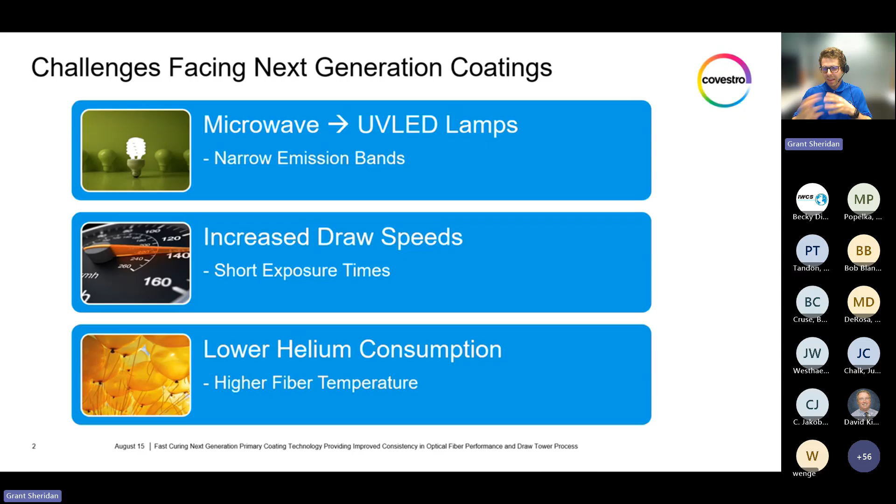So our work at Covestro is aiming to develop these next generation primary coating technology to meet the switch to UV LED lamps, access draw speeds above 3,000 meters per minute, and be more insensitive to fiber temperature for the mechanical properties.

Now, to demonstrate our next generation technology, we first ran our coatings and evaluated them using our in-house draw tower simulator, which is very handy for developing coatings as we were able to change the setup in-house. Our draw tower simulator is able to operate either on wet on wet application or wet on dry application, so we could really tune the process to the coating we're trying to develop. In particular, for this presentation, we are looking at a wet on wet application using UV LED lamps to mimic the switch in industry.

For the draw tower simulator, we use metal wire and feed it running down, and then for the wet on wet, the primary and secondary dies are coated here, and then run through up to 3 curing lamps, or 3 UV LED lamps in this case. With our draw tower simulator, we're able to vary not only the speed, but obviously the number of lamps or lamp power to vary exposure time.

So with our draw tower simulator, we're able to vary the draw speeds from 100 to 3,500 meters per minute and the number of lamps from 1 to 3 lamps. This allows us to access an order of magnitude in exposure times, from over 300 milliseconds all the way down to about 5 milliseconds for the shortest exposure time. Being able to vary the exposure time over this wide range really lets us evaluate these coatings and compare the next generation coating to our current coating technology in terms of cure speed and mechanical property buildup.

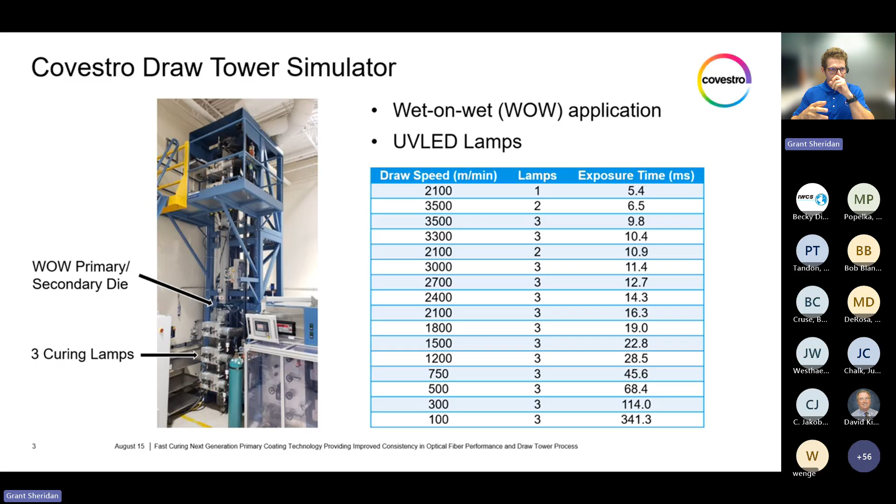So shown here is the cure speed of the next generation coating in blue compared to our current coating technology in orange versus exposure time. The RAU represents the reacted acrylate unsaturation, which is essentially just the double bond conversion measured via FTIR. So the first thing that I would say pops off the page is just how much faster this next generation coating cures compared to our current coating technology.

As we can see down here at the very short exposure time, this next generation coating has already achieved 80%, 82% cure at just 5 millisecond exposure time, while the current coating technology is lagging all the way down at 55% cure, which would pose challenges as draw speeds are increased over 3,000 meters per minute and exposure times are significantly reduced.

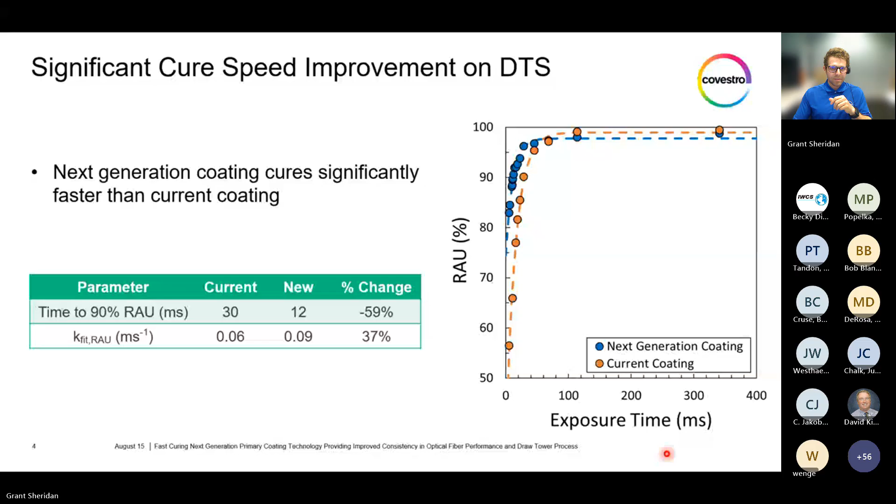So in addition to the cure speed, we also feel that the mechanical property buildup is just as important, if not possibly more important, to ensure that we're protecting the glass itself. Because if you cure your system but you have no mechanical properties, then the primary coating isn't really doing a whole lot. So shown here, we have the in situ modulus normalized to the maximum in situ modulus we see at the largest exposure time, versus exposure time.

And once again, we can see that the next generation coating is significantly faster at building up the modulus, building up the mechanical properties, compared to the current coating technology. Once again, we fit this to a pseudo first order kinetic equation, and we can extract a rate constant for the modulus buildup in this case.

Looking at the time to achieve 85% of the maximum in situ modulus, this next generation coating decreased this time by about an order of magnitude, from 78 milliseconds down to about 5-6 milliseconds, a significant improvement. Furthermore, there's an even larger improvement in the rate constant of this modulus buildup. We see about a 2 order of magnitude increase in this rate constant, which lends to the fact that for this next generation coating, the in situ modulus more or less plateaus very quickly after only a couple milliseconds of exposure time, lending to a more consistent in situ modulus with exposure time compared to the current technology.

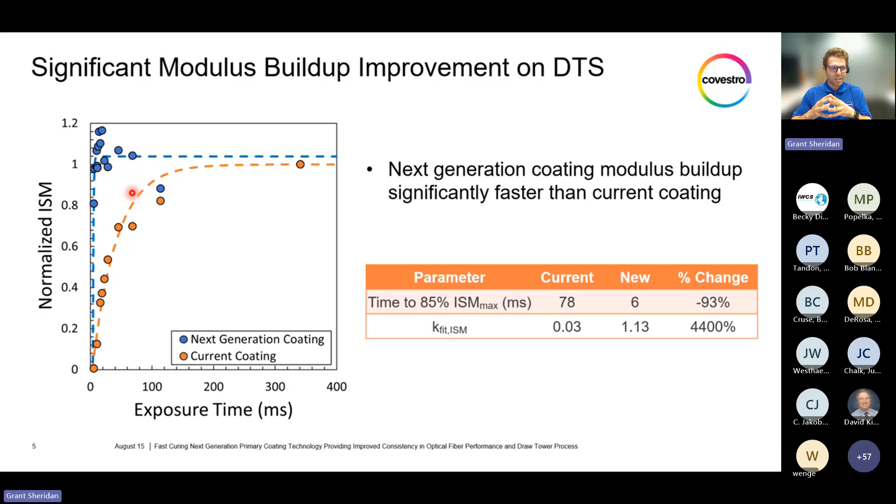Now, if we combine the RAU and in situ modulus, this is how we define our draw tower consistency. So we have in situ modulus on the y-axis and the degree of cure on the x-axis to define draw tower consistency. So if we look at the current coating first in orange, we can see that it sharply increases as we approach full degree of cure, 100% cure, indicating just how sensitive it is to any small degree of variation in the cure.

So you can imagine any unintended process variations that very slightly affect the cure of the primary coating will lead to drastic changes in the modulus seen. Additionally, we would anticipate that upon subsequent curing, during cabling or other curing processes, the modulus of this current coating would jump more drastically due to this steep increase in sensitivity shown here.

Now, if we look at the next generation coating in blue, we can see that unlike the current coating, the next generation coating plateaus with increasing RAU, leading to it being less sensitive to variation in degree of cure. We believe this significantly improves draw tower consistency, as any small variations in processing or in cure will lead to significantly smaller variations in the in situ modulus seen here. Additionally, we would anticipate that with subsequent curing steps, we would see a smaller jump in the in situ modulus as well.

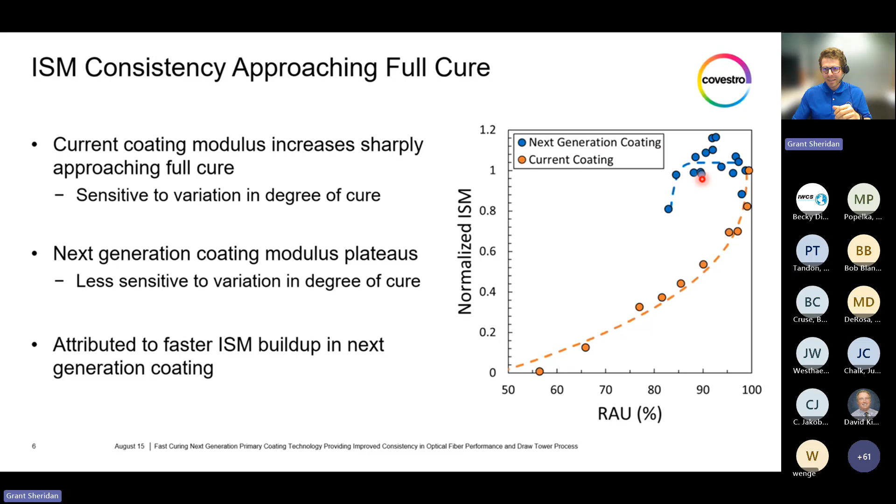Now you might be saying this is cool, but it's on a draw tower simulator. We use a metal wire. We don't have to worry about fiber temperature. So we took this next generation coating to the Nextrom R&D Center and trialed it on an actual draw tower.

Shown here are our process limits. We varied the draw speed from 1300 to 2800 meters per minute, as well as had varying glass temperatures from 42 to 120 degrees Celsius.

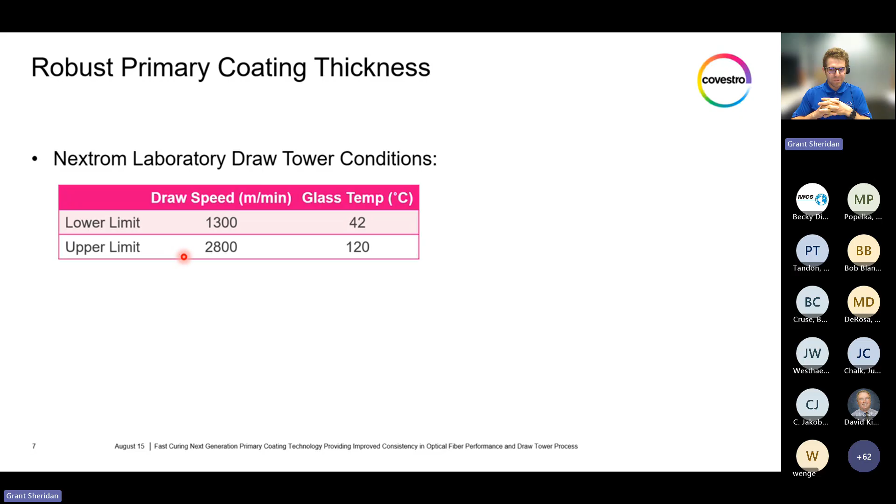Now, previous IWCS papers had noted that coating geometry, coating thickness is a very large concern with fast draw speeds and high fiber temperatures, as controlling thickness over a range of process conditions would be very important for consistent fiber production. So one of the first properties we looked at was the primary coating thickness, shown here, over an 80-degree range of fiber temperature.

As we can see, there's about a 5-micron decrease over the entire range from 40 to 120 degrees Celsius, with about 1.2 micron standard deviation in primary coating thickness. We believe this demonstrates the robustness of this next generation primary technology, lending to only a 1.2 standard deviation or a 5-micron decrease over a wide range of fiber temperatures all the way up to 120 degrees Celsius.

We believe that the fast curing nature, the fast modulus buildup of this next generation coating lends itself to the robust coating thickness, as we're able to lock in the coating geometry very fast before the fiber temperature is able to thin the coating more and more and lead to these inconsistencies in coating geometry.

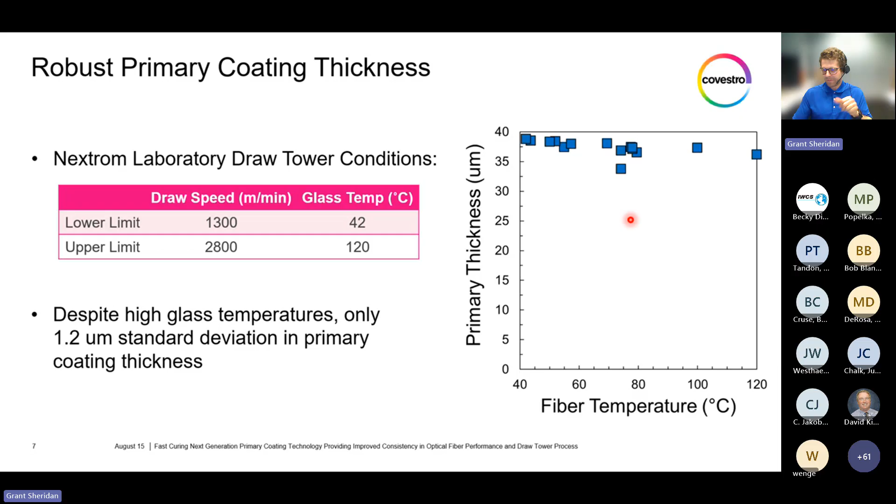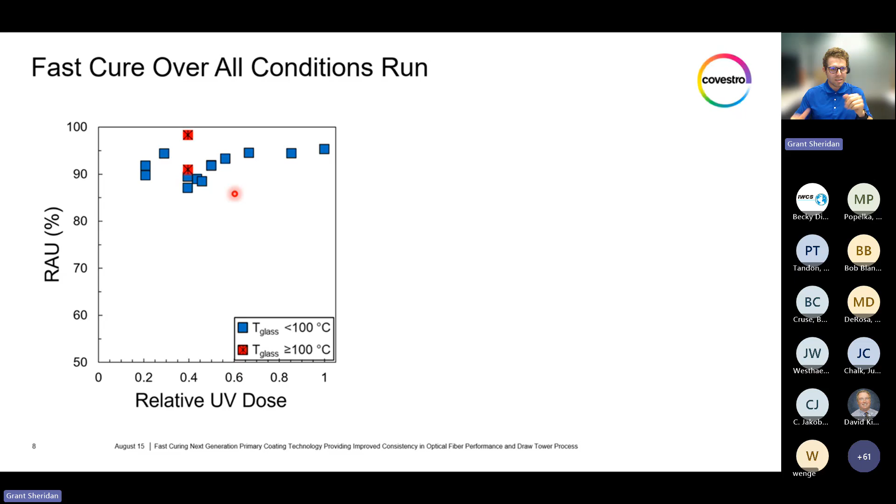Next, I'm showing the degree of cure of these coatings versus the relative UV dose, and have split it to show the glass fiber temperatures below 100 degrees C in blue and those above 100 degrees C in red. So as we can see, this next generation coating cures extremely fast as well, on an actual draw tower, to meet the high draw speed processing demands in industry.

We were able to achieve 90% degree of cure even at only 20% of the relative UV dose, of the maximum UV dose, further demonstrating this extremely fast curing.

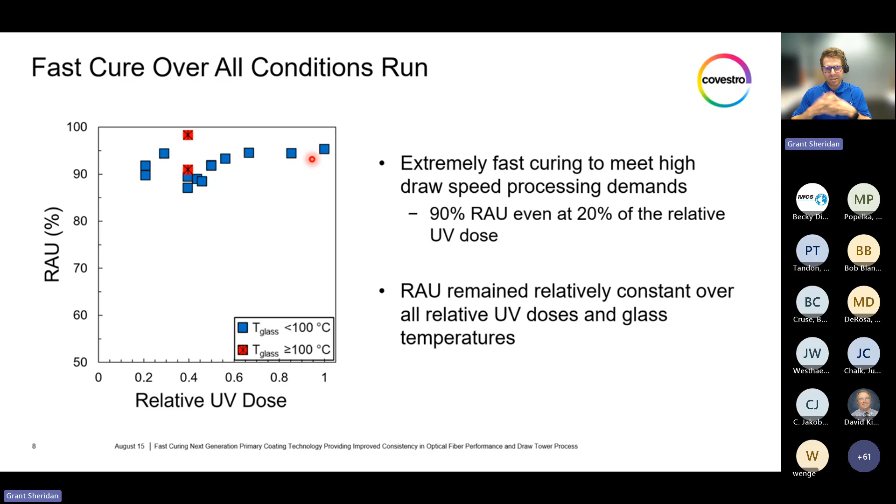Additionally, due to the extremely fast curing, the RAU remains relatively constant over all relative UV doses and glass temperatures, reaching 90% almost right away. It'd be very stable in terms of processing conditions if there are any variations, because there's not a lot left to cure at that point. So we believe that this extremely fast cure speed will lend well to the ever increasing draw tower speeds.

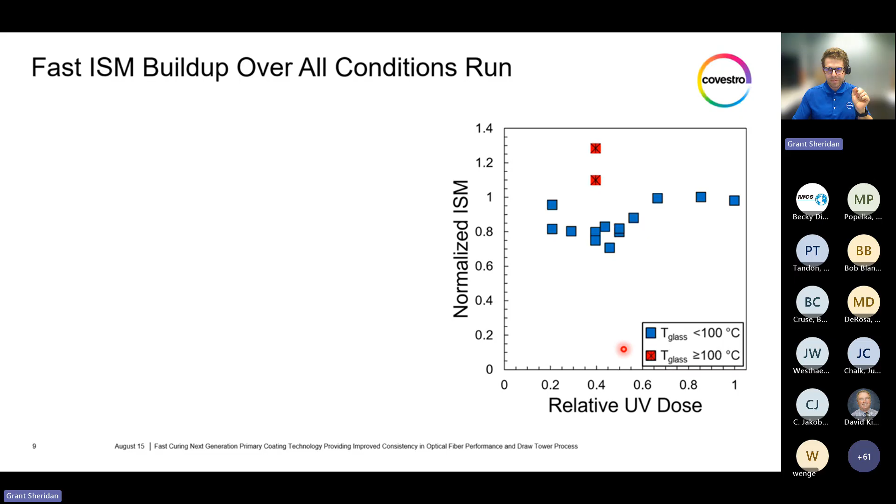Now, we looked at RAU, so we have to look at the in situ modulus and normalized in situ modulus buildup versus the relative UV dose, shown here again for fiber temperatures below 100 degrees C and those above 100 degrees C, where if we look at the blue data, the glass temperatures below 100 degrees C, we can see that we reached about 80% of the in situ modulus at only 20% UV dose again. So once again, very fast curing, very fast modulus buildup to protect the glass and develop the mechanical properties.

Additionally, we could see the improved consistency, as there's only about a 10% standard deviation in the normalized in situ modulus over all relative UV doses. Now, when we look at the high glass temperatures above 100 degrees C, we do see a small 10-20% jump in the in situ modulus relative to those below 100 degrees C.

However, we believe conventional coatings typically show a 2-3-fold increase with increasing temperature. So these next generation coatings further show more temperature stability and more insensitivity to the glass fiber temperature, in addition to the coating thickness shown before.

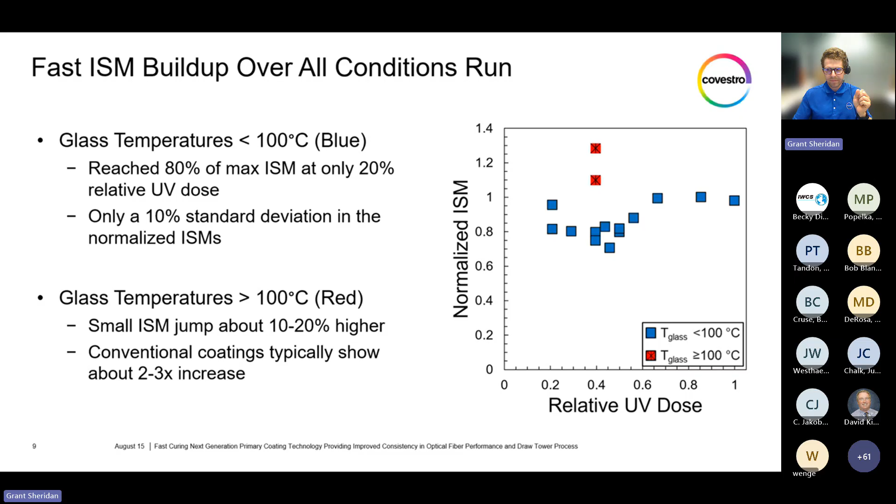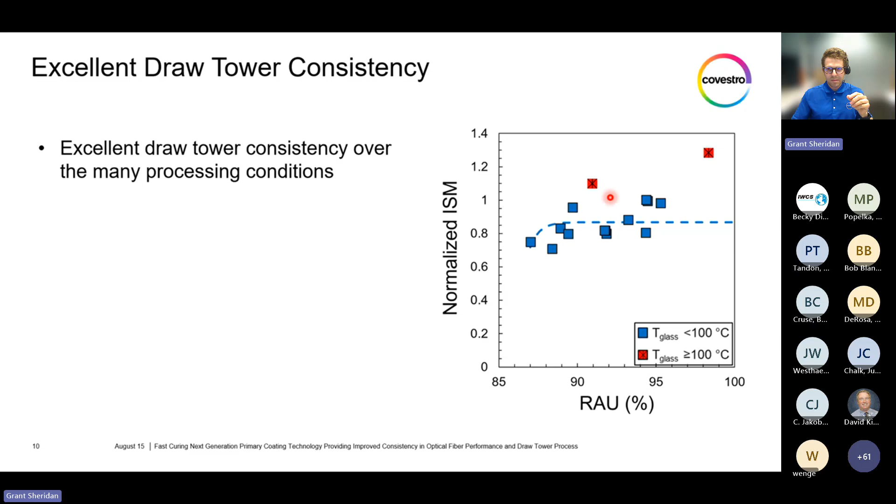Just like we did with the DTS data, we're looking at the draw tower consistency on this actual draw tower at the Nextrom R&D Center. So we have the normalized in situ modulus versus the RAU. As we can see, once again, we see very excellent draw tower consistency over all the processing conditions, all the draw speeds, all the fiber temperatures, where the in situ modulus quickly plateaus and is exhibiting more insensitivity to the RAU, as our current technology had shown on the DTS.

This enables maintaining an in situ modulus level, even with small drifts in process conditions, and should reduce the modulus jump with subsequent curing.

Now, cure speed, modulus buildup, coating thickness is nice, but we also wanted to test actual fiber performance, and one of the first ones we looked at was low temperature microbending performance to ensure it will still operate as a fiber optic cable. So using the method D, basket weave method, to look at low temperature microbending performance, where we use 2.5 kilometers of fiber, wrapped via basket weave at wind speeds of 100 meters per minute.

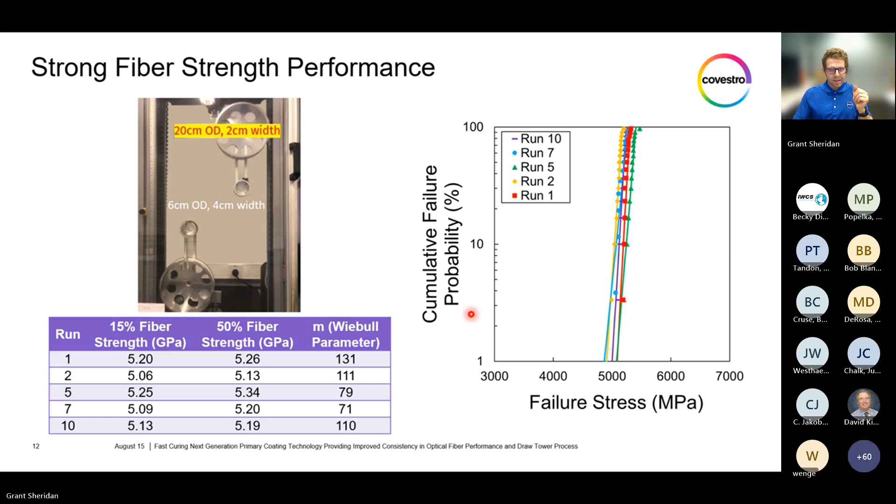So overall, it's been hopefully demonstrated that this next generation primary coating technology improves over the current technology. It demonstrates extreme cure speed improvements over the current technology, modulus buildup improvements, and draw tower consistency improvements to sort of meet the switch to UV LED lamps, as well as draw speeds in excess of 3,000 meters per minute. We also enable better low temperature microbending performance, in addition to the significant improvements in cure speed.

And these next generation coatings also provide robust draw process capability, being able to meet the high draw speeds, higher fiber temperature on UV LED curable, while maintaining consistency with coating geometry, in situ modulus, and RAU. Now, this was just one of sort of the coatings from this next generation coating technology. And based on this technology platform, we were able to adjust and fine-tune the coating and fiber performances for different applications with excellent flexibility.

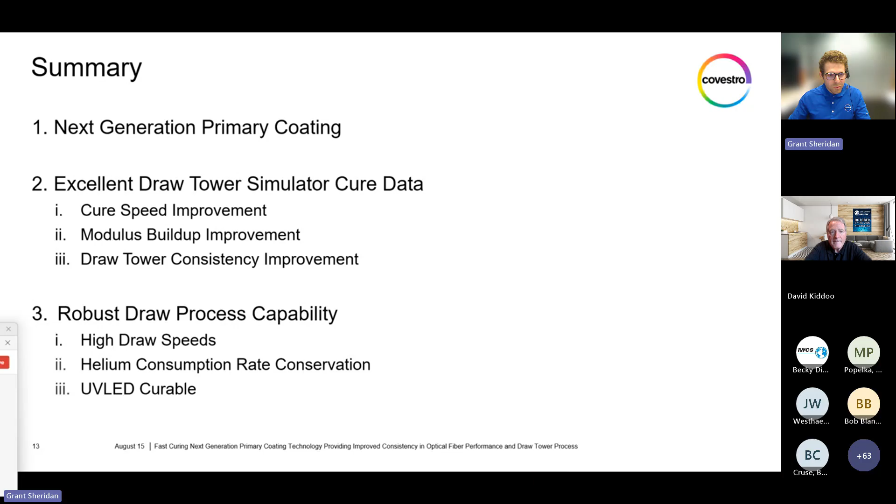How does the microbending compare to the current coating technologies that are commercially available? Yeah, so for our current coating technology, we have been able to further push sort of the low temperature microbending performance, push better performing change in attenuation, especially at -60 degrees C, where we really challenge the glass transition temperatures of these primary coatings. So we've been able to further advance and further decrease the change in attenuation at the very low -60 degree limit.

Good. All right. How do these new coatings provide for sufficient pull-out force? Yeah, so of course, the adhesion to the glass is very important, and pull-out and strip force are also very important properties. We're able to tune the adhesion, or the pull-out force, for certain applications. With this one in particular, being the start of the technology, we were able to achieve around 3 to 5 newtons of pull-out force.

But through further development, we were able to push that up higher to 8 to 10 newtons. But obviously, too high adhesion is also not desirable. So we've been able to develop a wide range of adequate pull-out force above 3, 4 newtons. It's great.